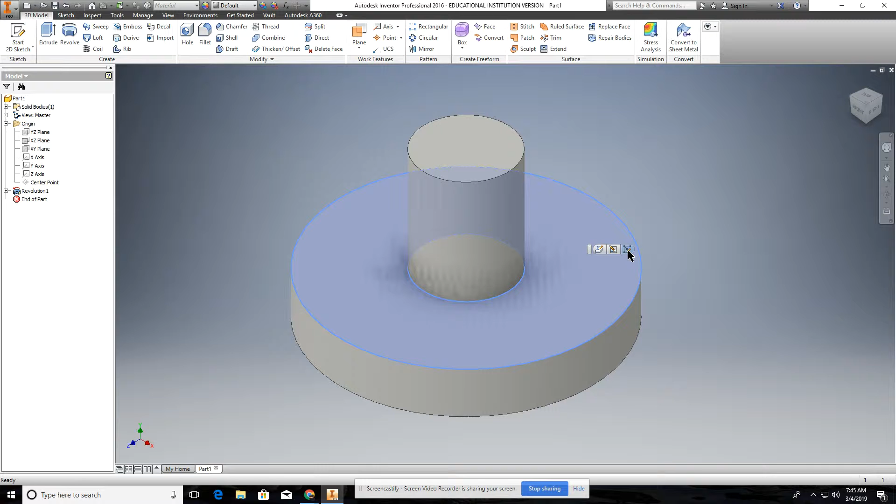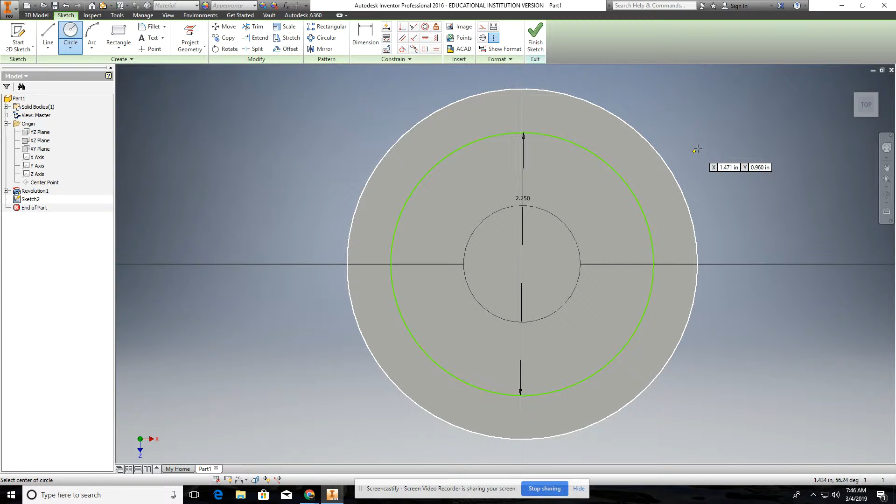And then if you look at that drawing, it says the diameter of the center of those holes is 2.25. So there's a number of ways that you can do this. I'm going to show you one way, which I think is the easiest. You're going to go to the middle of this, and you're just going to draw a 2.25-inch diameter circle, and then you're going to put a point.

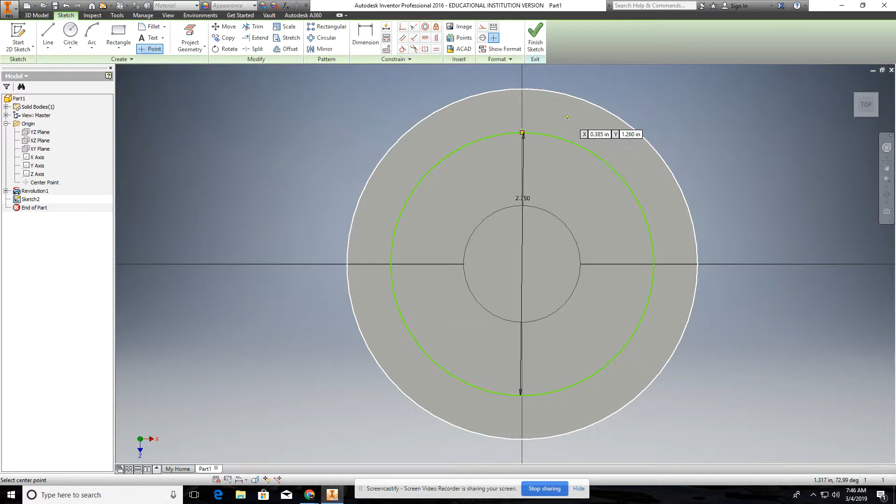All right, this is something new. It's a different way that we're going to put a circle in, but we're going to use this point command, point center point, mainly a center point for the hole. And then we'll go straight up, at this quadrant right here, and it'll kind of lock in. You're going to put that center point there, and that's the correct distance out from the center of that.

So we finish our sketch here, then we go to the hole command, and it should come up with from sketch. It usually does. It's smart enough, and it should automatically select that and put a hole in there, and then the diameter of this hole is 0.25. Make sure it's through all.

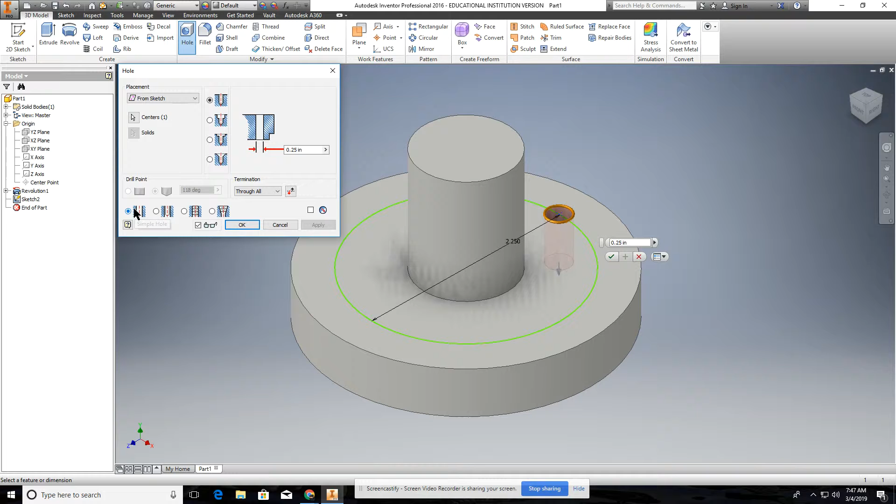Just so happens it's at 0.25, and then it says it's equally spaced. Well, we're going to put the hole in right here for right now, so we'll go to OK, and it's a simple hole. Then we're going to use a circular pattern in order to create 8 holes equally spaced. So we go to circular pattern here.

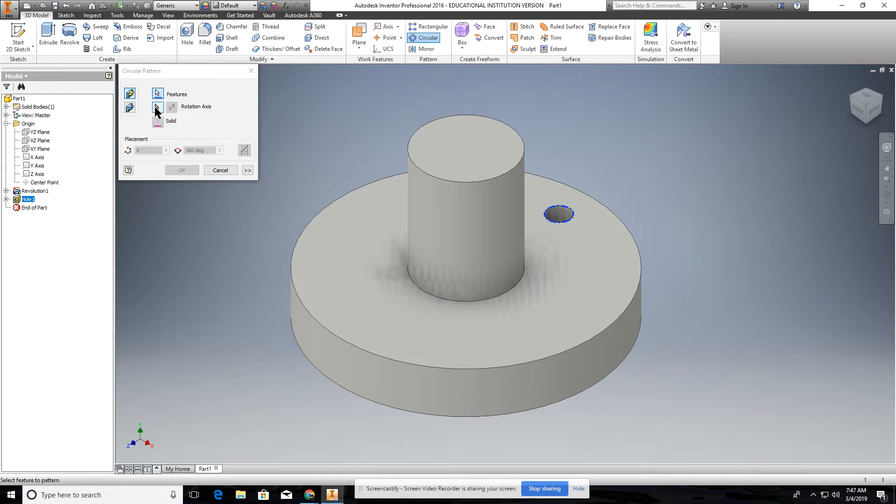It says feature. So the feature we want to copy in a circular pattern is this hole, so we'll choose that hole. And then here it says rotation axis. So we choose that, and all we have to do is choose either this cylinder or this one, because it's going to rotate it around a center axis, which is basically the center of this.

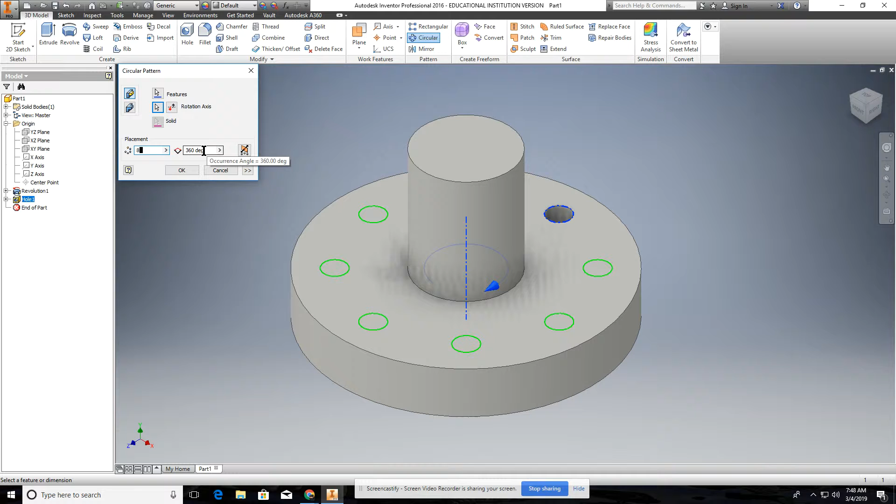And we're going to do 8 holes, so we put in 8, and see it equally spaces it because we're choosing 360 degrees, which is what it defaults to. If it didn't, then change that to 360. Then you go to OK, and there's your holes. Simple enough. So that's how you do that. Next, I'm going to show you how to put this into draft like we normally do.

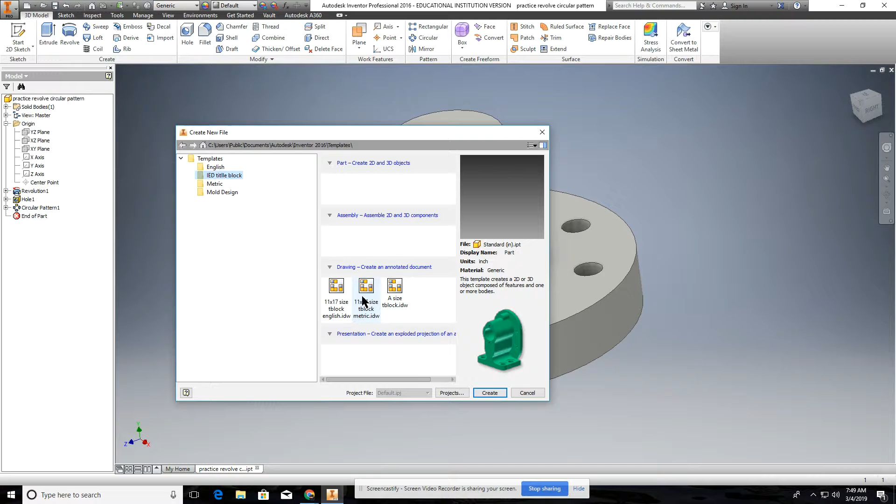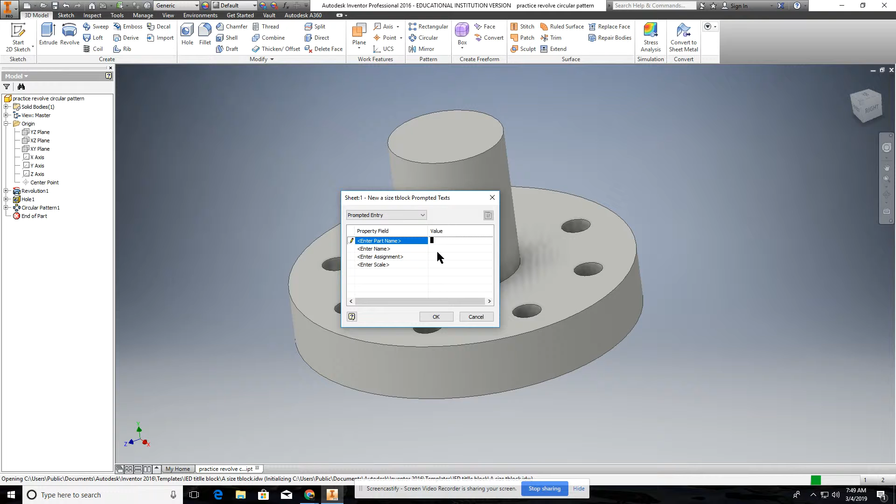So you go to your IED title block, and we're going to just choose an A size sheet. You're going to bring in the different views, just skip all on this, and fill out this information here as far as what it is. Part name for this one, let's just call it practice circular pattern. Go to OK.

Go to OK there. And then we're just going to do our base view, and the base view is going to be this. I know in our section views it was the top view, but we're just going to go ahead. And again, you can move this around, and we'll get our different views.

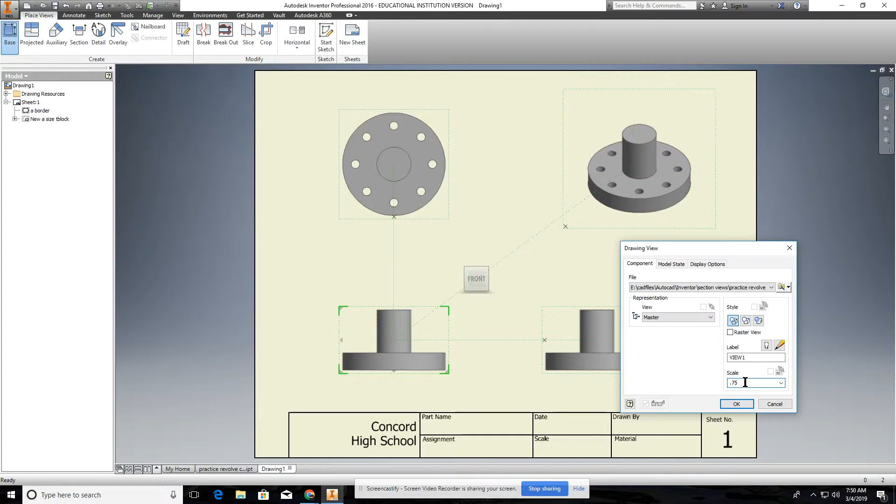Now you'll notice that the scale is probably a little big. So we're going to put this at 0.75 to make it a little bit smaller. That means the scale is 3/4 of an inch equals 1 inch. And go to OK. The rest, you're going to just dimension on your own.

Oh, you know what? I forgot that hole in the middle there. You guys will have to put that in. I could go back and do that real quick. To put that hole in, just go to the hole command, do concentric, put the size of it, which in this case is 0.375.

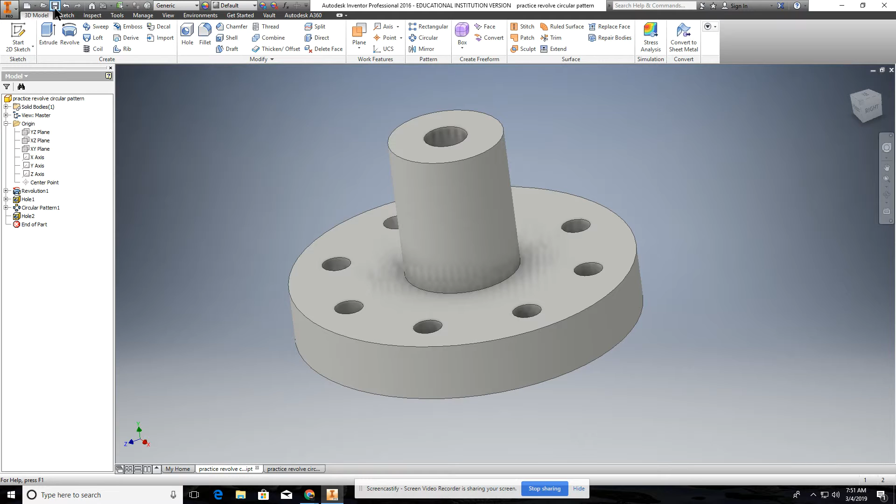Make sure it's through all, then just click up here, and then click the cylinder, and that does it. Then just save it, and it should update in there. Again, make sure you save it to your drive, and there, it updated it. Now I want to show you how to do the center line for this. So you go to annotate, and we want to do this one.

Centered pattern. So the first thing it asks is center of circular pattern, down here in the lower left hand corner. So you just choose this, and then click on a location where you want to start. I always just go to this center here and then come back all the way around to this one. Click that, and then you can move this around till you get it just right, so it goes all the way around.

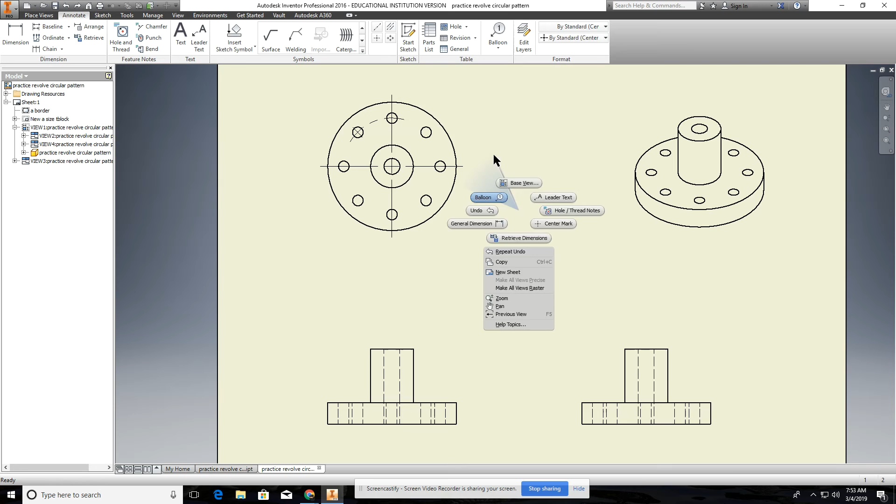And if you want to move this around, right mouse click and go to create. You can drag this, selecting it and dragging it around so it goes all the way around like that. That's it.